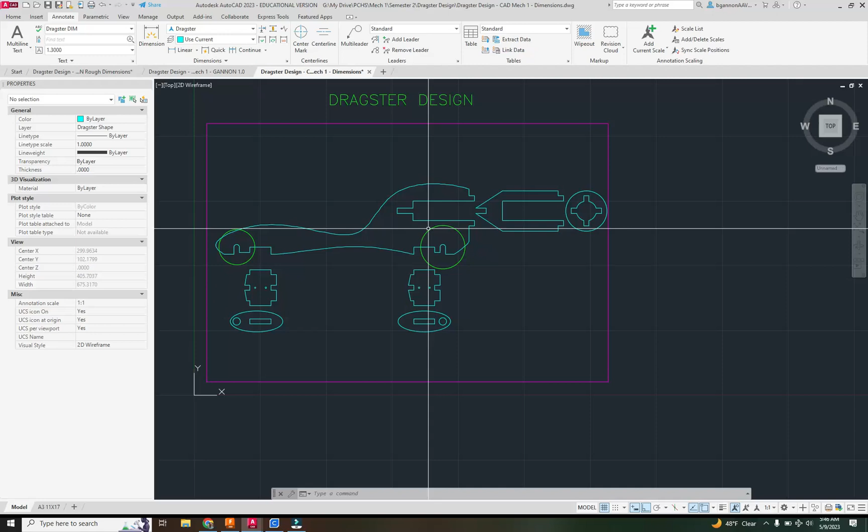Alright everyone, so when you finish your dragster design, you're going to want to add dimensions on here. So I finished my design, everything's lined up, and what I want to do here, I'm going to go over from my home tab to annotate.

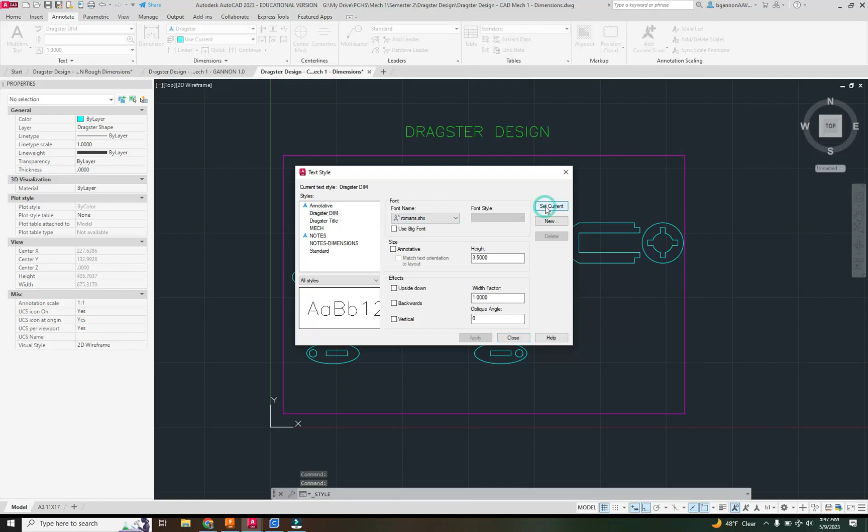We have a couple things on here, so for text I want to change to dragster dim, that should be set up for you. Select dragster dim or dragster dimension, then go to manage text styles, and please make this current. It's going to make your job way easier. So dragster dim, set current, close, and do the same thing over here.

I'm going to select the dragster dimension, and I want to manage dimension styles. Click on dragster and click on set current, and I should have done that before I created this template for you. But now when I go to create some dimensions, for example, let's create some linear dimensions first.

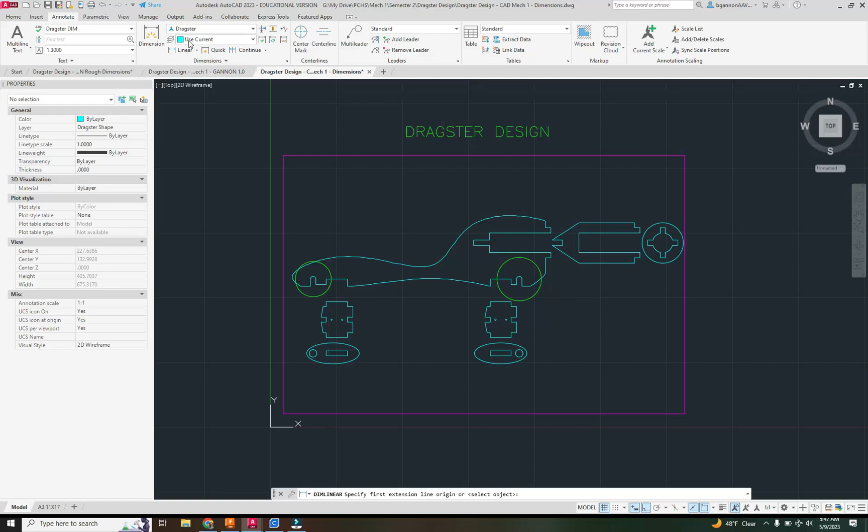I want to make sure I'm on my dimensions layer. Now when I go to create some dimensions, for example, I want to create one right here like so. You can see that dimension pops up. If you want to make them smaller, you are welcome to go in - you can see, looks like I've got to change this as the dragster dimension.

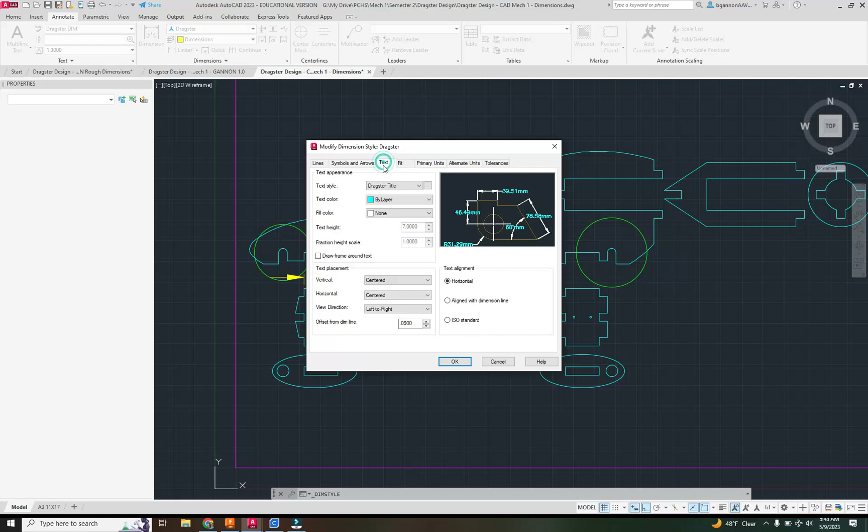So let's go back in and manage dimension styles here, and let's go to modify, and let's make sure that the correct text is selected. Dragster dim, there we go. Click OK, click set current, click close.

Now when I go to change this for a linear dimension, for example, I want to do this length here, that should be much better. That looks much better. And then add dimensions on here as you go.

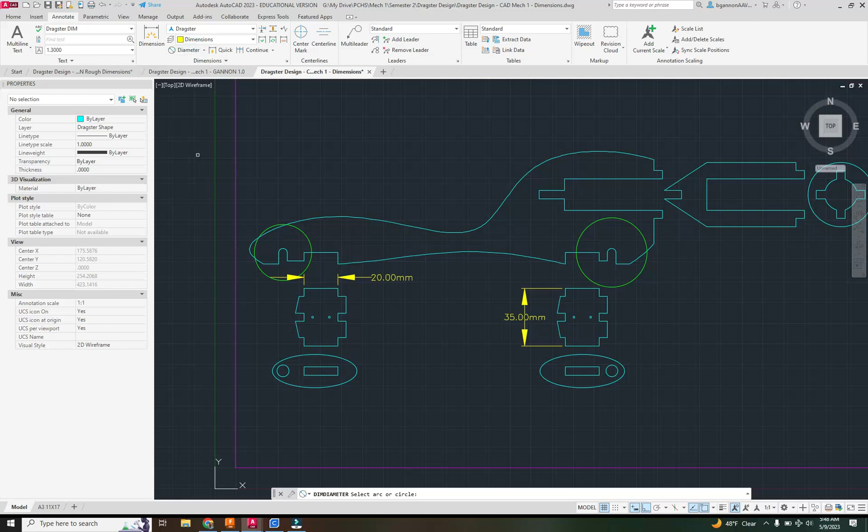I'm just going to add a few for you to see right now. For example, I want to add a diameter for these wheels. If you don't have these wheels, you don't have to add them, but add what you see here. I'll add this wheel too, like so.

I'm going to get rid of these crosshairs. Remember this here from some other assignments. But I want to get rid of my center mark. So no center mark on there, like so.

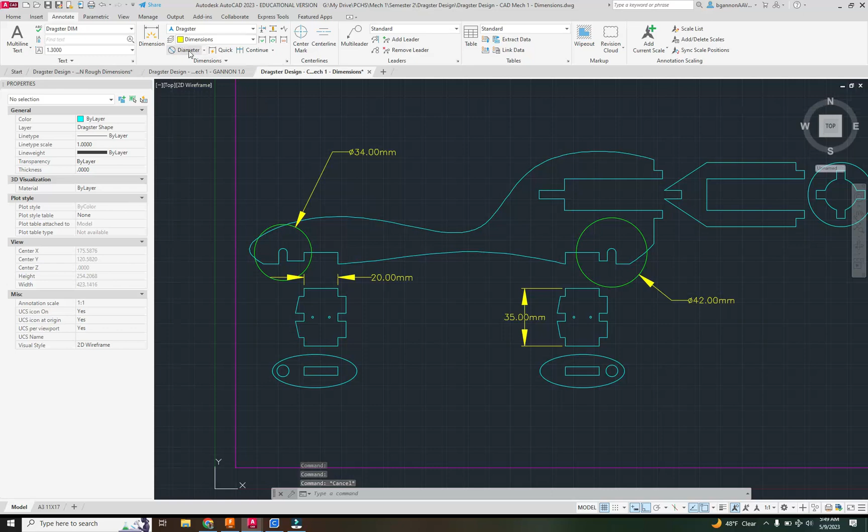And then continue to add dimensions on here. So I'll do some linear dimensions going across from here to here, so we can see that 58. I'll do a linear dimension here, 19. I'm going to do the length of my car too.

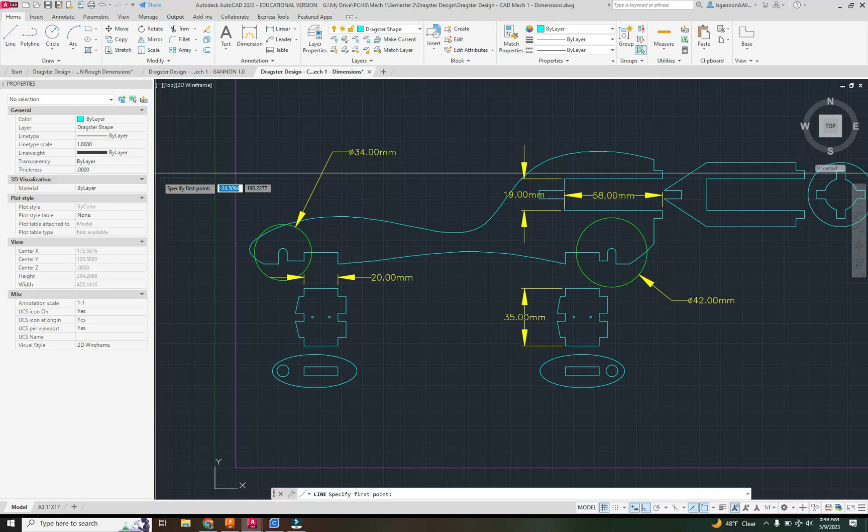I might have to create a line first here to represent the front of the car. So I'm going to try and find the nose of this car, and I'm going to go to nearest, and try to draw a line straight up and down. There we go, that's going to be the nose of my car.

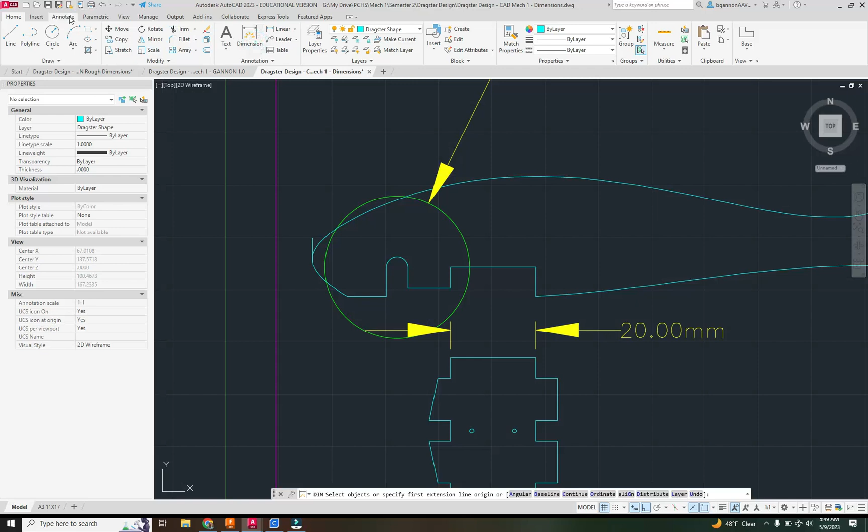And then I'm going to draw a dimension line from there. Annotate, linear dimension, from there going all the way across. I want to go to the length of my car, which is there. So I can bring this all the way down too. You can see it's 244 for that car.

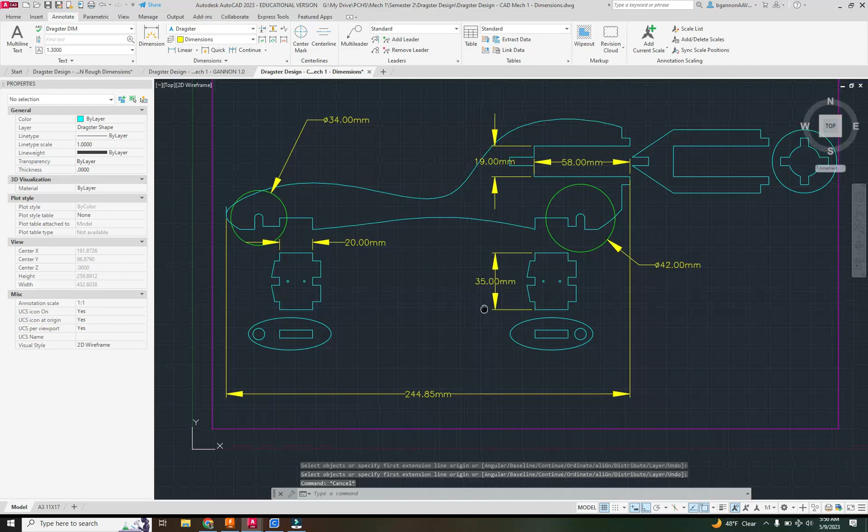And then continue to add dimensions on here. I'll post my final one on Canvas, but the big thing here is you want to be on the dragster dim text style and then the dragster dimension style. Go into manage dimension styles, go to dragster, go to modify. Go to the text here, dragster dim, go to lines, text, dragster dim, click OK, click set current, click close. And that should work out for you.